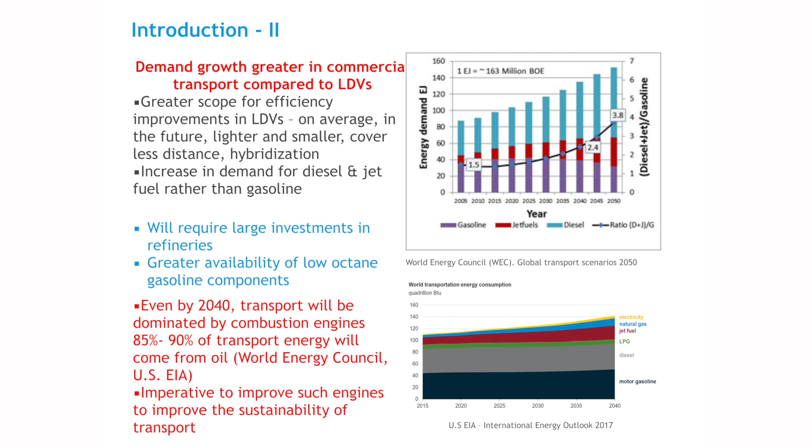And this will result in greater availability of low-octane gasoline-type fuels, which would normally have gone to make gasoline, but the demand globally is decreasing. These trends may be different in different countries, but I'm talking about the global trend. And this trend has been recognized by the oil industry for a long time. So lots of investments are being made to make more diesel and jet fuel, especially jet fuel. Jet fuel demand is increasing extremely fast in non-OECD countries.

So this is important because we have to start using these low-octane gasoline components as well in transport in the bigger picture, and I'll come to that in the end. But the main headline is that most credible projections say that even by 2040, transport will be dominated by combustion engines.

85 to 90% of transport energy will come from combustion engines, and about all that energy will come from oil. So World Energy Council, US EIA, BP, ExxonMobil, OECD, and various other oil companies also come to this conclusion. So it is imperative to improve such engines in order to improve the sustainability of transport. This is important to remember when I talk about battery electric vehicles and so on.

Let's focus on the electrification of transport, because this is a topic of great interest, especially today. First of all, we have to remember there are different degrees of electrification. When we talk about eliminating the internal combustion engine, we are talking about battery electric vehicles, which do not have an internal combustion engine, and all their energy comes from the electricity grid. Therefore, they need a much larger battery compared to the other types.

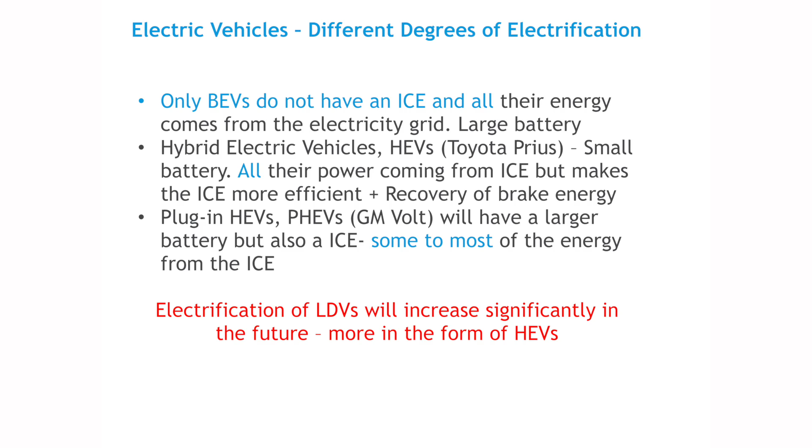On the other end of the spectrum is the hybrid electric vehicles, like the Toyota Prius, what they now call self-charging hybrids. In fact, all the energy in hybrid electric vehicles comes from the liquid fuel running the internal combustion engine. What electrification does is make it more efficient. And in fact, basically, this is the best solution for electrification. I might as well say it now, and I might say it again later.

And then there are the plug-in hybrid electric vehicles, where the battery size is larger and you have some ability to run on electricity, maybe 60, 70, 80 kilometers or so. When you run out of charge, the internal combustion engine will come in and take over. So only battery electric vehicles like the Tesla do not have an internal combustion engine. So when we say eliminate internal combustion engines, we are talking about going to battery electric vehicles.

So what is the outlook for electrification? Sales of plug-in electric vehicles, that is the battery electric vehicles and the plug-in hybrid electric vehicles, are rapidly increasing. In 2019 in the UK, roughly 73,000 were sold, around 3% of the total sales of cars. Globally, it's about 2.5%. By the end of 2019, in the UK, the battery electric vehicle stock was about 100,000. That's less than 0.3% of passenger cars.

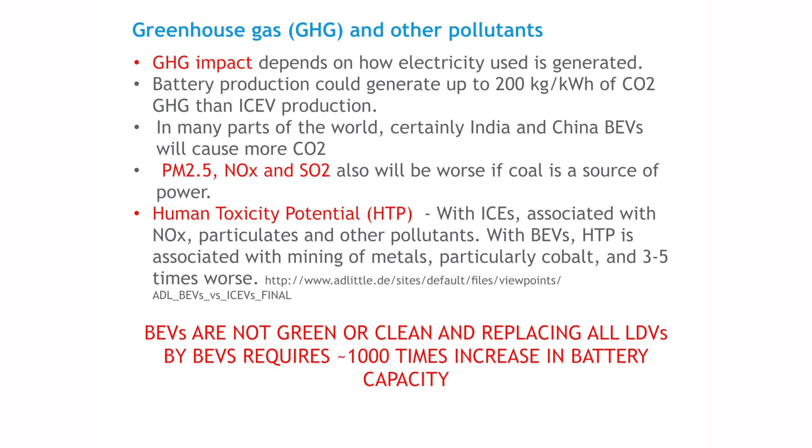Because this has big implications, all the car manufacturers, for example, are against looking at this in detail, because really you have to be looking at the total life cycle analysis and the real impact of battery electric vehicles on emissions, especially CO2 emissions.

Someone once described to me that battery electric vehicles should be called EEVs, emissions elsewhere vehicles. Yeah, because that's what you're doing.

You're just shifting the emissions to somewhere else. Certainly in many parts of the world where transport demand is growing, like India, China and the rest of Asia, battery electric vehicles will cause more CO2 compared to the internal combustion engine because of the energy mix and the CO2 footprint. In fact, there is a new report from Germany saying even with the German grid system, an average sized German car will be worse for CO2, taking into account the whole life cycle analysis, than a Euro 6 diesel.

So it is not true that battery electric vehicles are zero emissions vehicles. And of course, the other emissions like PM, small particulates, NOx and sulfur dioxide will also be worse in places like China, which use a lot of coal, and where the power generation is within the city limits, like in Beijing. In fact, there are several papers which show that the air quality will be worse if that is the case. But this is not the case in the UK, of course. I'm just making the global point.

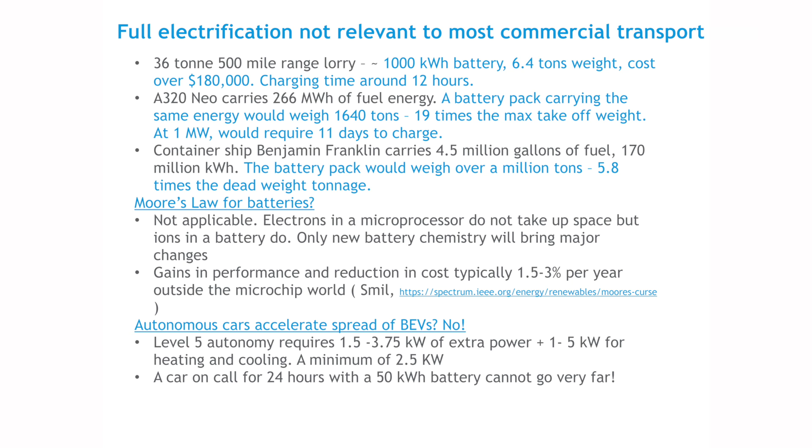Now this is the question. Quite often battery enthusiasts quote Moore's law for batteries. In fact, Václav Smil calls it Moore's curse, because he points out that this is not possible - there is a physics reason for this. Moore's law applies to microprocessors and electronic devices where electrons are the workhorses, essentially, whereas in batteries it's ions which actually occupy space. So if you want to make a big difference, you really have to invent a new battery chemistry, and that is not on the horizon, though every day there are announcements that somebody has improved batteries, etc. But remember, we are not talking about increasing by 10%, 20%. If you want to run aviation on batteries, we have to increase the battery energy density by a factor of 70.

So Moore's law is not applicable. And there is also another myth, in my opinion, that autonomous cars will accelerate the spread of battery electric vehicles.

Think about what autonomous cars would do, say a New York taxi on call 24 hours a day. Level 5 autonomy requires an additional 1.5 to 3.75 kilowatts of extra power for electronics and sensors, plus 1 to 5 kilowatts for heating and cooling in New York, for example. So a minimum of 2.5 kilowatts, over 24 hours that's 60 kilowatt hours gone. So if your battery is about 50 kilowatt hours, you won't be able to drive anywhere, basically.

So the best solution for autonomous cars is actually hybrid electric vehicles, like the Toyota Prius, because you don't have all these issues with them. Of course, there are other economic and other implications, cost and availability of infrastructure, for instance.

In the UK, 45% of cars don't have access to garages. So if you want to spread this really across the board, you need a very large public charging infrastructure. About 20 million people would need 20 million charging points. People have estimated this would cost anything between 30 and 80 billion pounds.

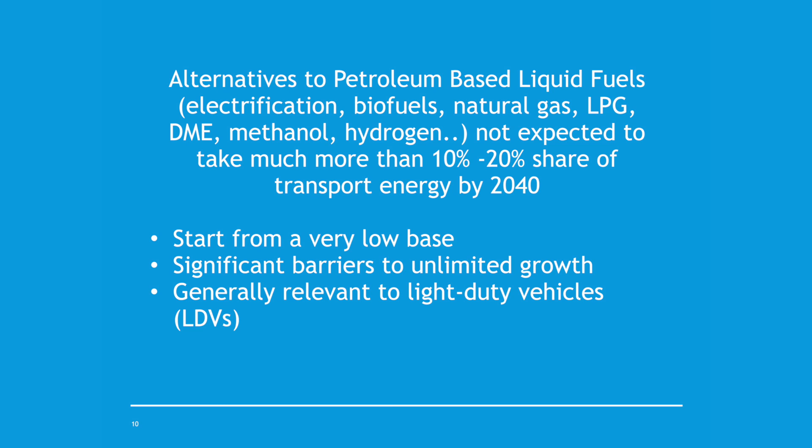Well, there has been some talk about aviation going carbon neutral very quickly. I'll come to that in a minute in terms of these new fuels.

Let me illustrate some points. Biofuels are very well entrenched in the transport sector, especially as ethanol. The current share of biofuels is only about 2% of the total transport energy demand. Ethanol is primarily the main one, and about 100 billion liters of ethanol are produced per year. These are 2018 figures; 2019 might be slightly higher.

There are many drivers for biofuels. In most countries, it is import substitution, self-reliance, security of supply, and so on. India spent a lot of money and effort trying to reduce import of oil by going to biofuels. There's also use of agricultural surpluses, and in some cases they might have greenhouse gas benefits, depending on assumptions.

However, most environmentalists are now against biofuels, mainly because of the food versus fuel argument for land. They also have higher costs per unit of energy. That's a different matter. Deforestation, water, and fertilizer use, along with the land issue, is a very big barrier for unlimited growth of biofuels.

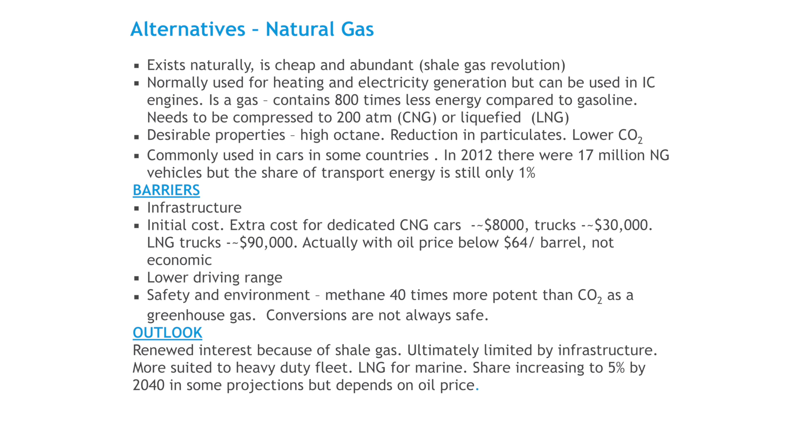But the main barrier is still infrastructure, because you have to move around natural gas. And the initial cost is high, and the driving range is low, etc. But the outlook is there is renewed interest, and some people expect it to go to 5% from the current 1%. So we are coming from 95% transport energy from petroleum-based fuels to more towards 85-90% now with things like this.

There are other alternatives, liquid petroleum gas, dimethyl ether, and methanol, which have niche applications at the moment. And I think of all these, methanol is the most interesting. There is a lot of interest in methanol because it can be made from very low quality coal. And there is a lot of interest in India, and China is already using a lot of methanol, for example. So methanol also has some good combustion properties, though there are some bad properties as well.

That's a different matter. But essentially, I could say use of such fuels makes sense somewhere, sometime. And they will continue to be used as niche fuels, except that, in my opinion, methanol is a very interesting future fuel which could increase its usage.

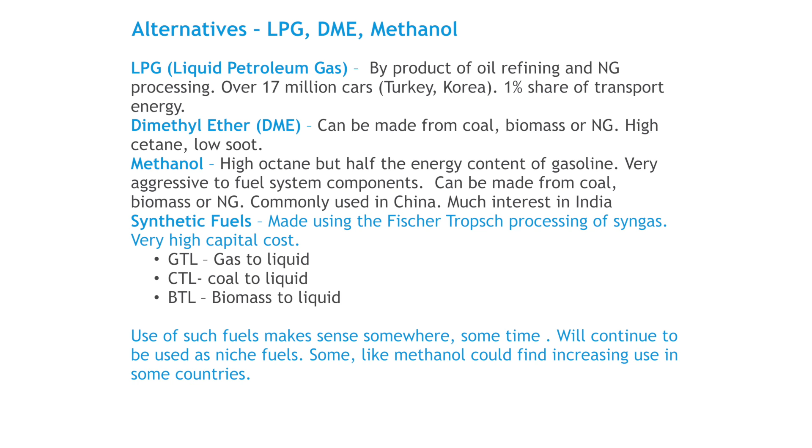Here is an interesting thing. Hydrogen is a big favorite now, and it has been a favorite for a long time. Under the Bush administration, several $1 billion were spent on hydrogen research, basically. But the problem with hydrogen is, like electricity, it's an energy carrier. It has to be manufactured, and it's very energy intensive to make it. And it can be made from almost anything, you can say, but if you were concerned about CO2, it has to be made from CO2-free energy.

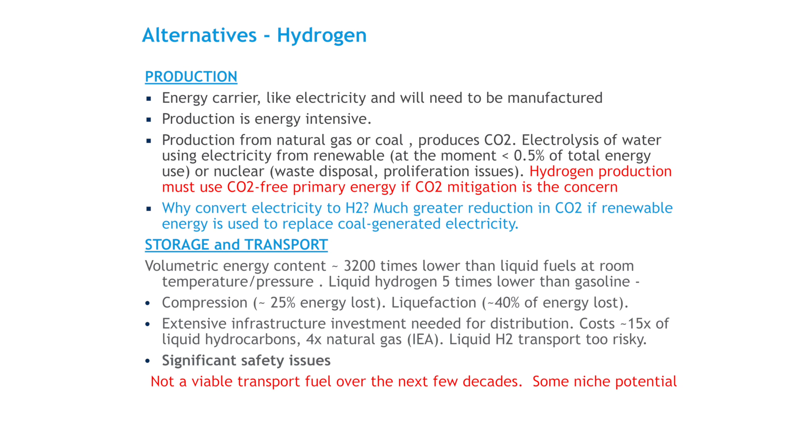So the question is, if you have enough CO2-free primary energy, why convert it to hydrogen? Why can't you use electricity directly? These are the questions. In fact, Elon Musk keeps asking this question every time, by the way.

And the big issue about hydrogen is the storage and transport issue. It has to be compressed or liquefied to carry enough energy on board, for transport, I'm talking about. It can be used for other applications, okay? But that will lose 25 to 40% of the energy. And the infrastructure required is extremely expensive. During the Bush administration, a lot of US government institutions studied this, and the costs are 15 times the cost of liquid hydrocarbons, and 4 times the cost of natural gas for the distribution network.

So at the moment, it's not a viable fuel for transportation, in my opinion. And it will require huge amounts of investments in renewable energy before it comes into serious contention. So even in 2040, I said that roughly 85 to 90% of transport energy will come from petroleum-based fuels. So improvement of such systems is imperative to ensure the sustainability of transport.

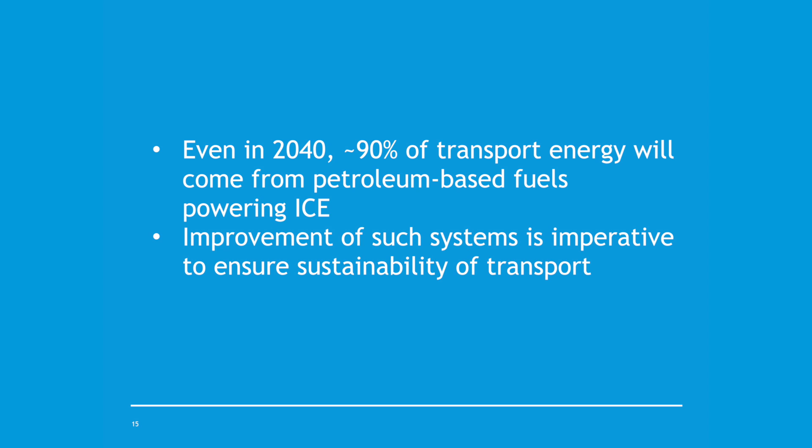Let me explain this. When we say battery electric vehicles are not zero CO2, say you're saving 20% of CO2, okay? And they're only about 0.3% of the total car park. So if you improve the efficiency of the other 99.7% of the car park, you could make a much bigger impact on CO2 emissions at the moment. Okay? So how do I see this? I see this as there are 3 stages to this.

In the first stage, conventional engines, the engines that we know now, using fuels that we know now, improve their efficiency and reduce their fuel consumption. And there is tremendous scope for this. I'll just explain some of the points here. Through better combustion, better control, better after treatment, coupled with partial electrification, like with hybrid electric vehicles, to make huge impacts in the efficiency of current engines. And in stage 2, we can think of developing new fuel and engine systems, okay, which allows greater scope. I'll come to that in a minute.

And in the final stage, in the long term, as the overall energy system is decarbonized and battery technology develops a little bit better, there will be an increasing role for battery electric vehicles as well as for hydrogen. And in this context, I think I have to mention so-called electrofuels. Electrofuels basically use renewable electricity to make liquid fuels using CO2 and hydrogen.

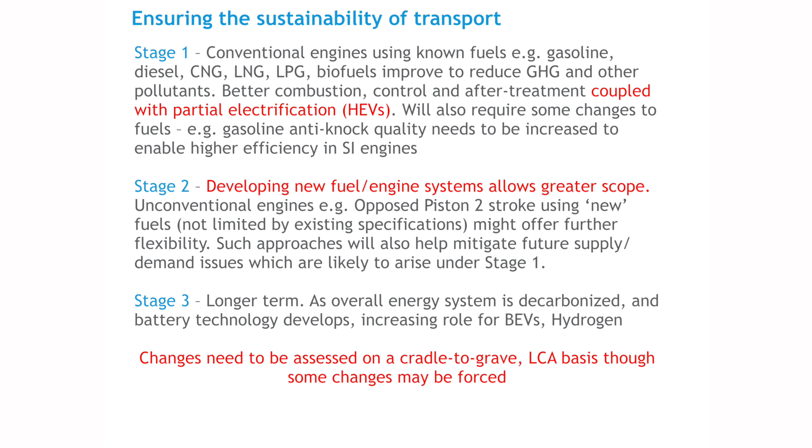Okay, and this is the kind of thing that the aviation industry is talking about, because you can have zero CO2. But the energy calculation for this is extremely bad, because it takes a lot of energy to make these liquid fuels.

In the last few days, I've been engaged in some calculations with some friends of mine at Imperial College and so on. And to cut a long story short, if you want to convert all of aviation globally to electrofuels, essentially the world will have to build an equivalent power system of about 400 plus nuclear power stations of 3 gigawatts, or more than 1 million 3 megawatt wind turbines.

Okay, so it is not trivial, and it's not going to happen in most countries, and in fact it is not going to happen even in Europe, I think, because the costs of it are going to be very high. So when the aviation industry say they're going to go to zero carbon, I mean, this is the same argument for hydrogen as well. Hydrogen is a bit better than electrofuels, because the energy conversion to hydrogen is better. But basically it's the same problem.

Okay, now what is the scope for improving the internal combustion engines with existing fuels? To cut a long story short, if you combine combustion improvements, control improvements, partial electrification, possible lightweighting of vehicles, vehicle downsizing, and so on, you can reduce the fuel consumption by 50%, okay, with existing technology. But it requires you to go to lighter cars and smaller cars and better combustion systems.

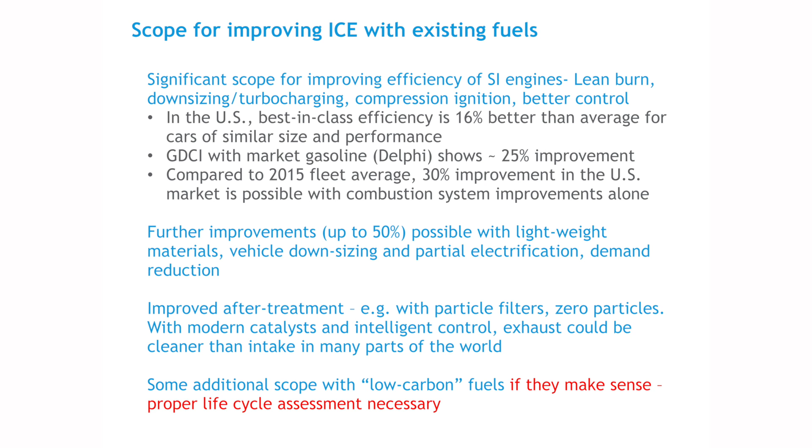Now, let me just quickly mention some examples of fuel engine system development in a few more slides. One of the very interesting areas is the so-called gasoline compression ignition. Okay? The problem with diesel engines is that they have high NOx and particulates. The reason this is so is because they use diesel fuels. The diesel engine is the right combustion system, but for historical reasons, it's been using the wrong fuel.

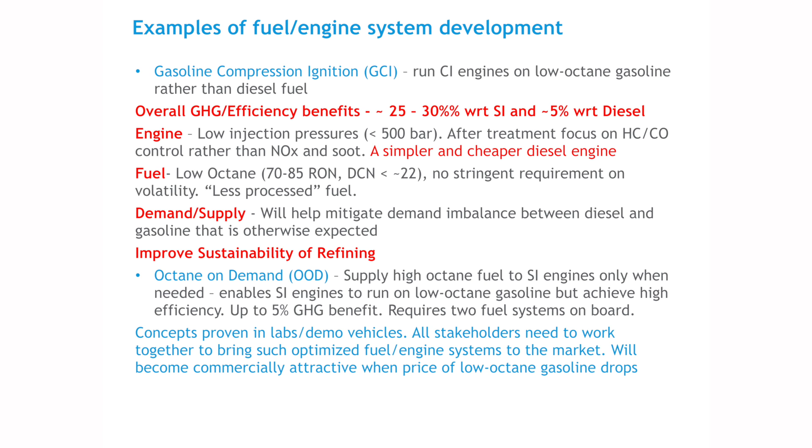And in fact, the reason this happens is that diesel fuel ignites very, very quickly because that's what it's intended to do. And therefore, before it has a chance to mix with oxygen in the cylinder, it starts burning, and that's what causes these emissions, basically. But if you use gasoline-type fuels, especially low-octane gasoline-type fuels, these are more resistant to auto-ignition, so they'll have more time to mix before they start burning. And therefore, you can reduce the amount of NOx and particulates produced inside the cylinder very, very significantly. You can go to zero, in fact.

And there has been a tremendous amount of research done on this recently, in the past 6 or 7 years. I demonstrated this about 2006 and 2007. And Saudi Aramco, by the way, are putting a lot of money into developing this technology. So this is an example. Remember, I mentioned right at the outset that we might have an excess of low-octane gasoline fuels available. And these are exactly the kind of fuels that can be used here. So it will solve a lot of problems together. And there are other technologies also which can use low-octane gasoline.